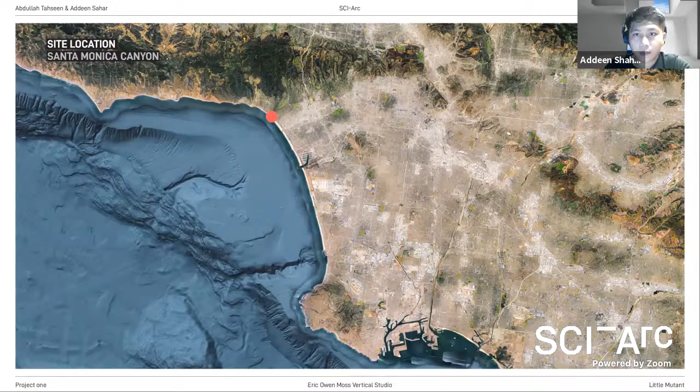So, as Eric Owen Moss said, the site is located in Santa Monica Canyon. The single family house project is at 211 North Entrada Drive, Los Angeles, in a neighborhood called Rustic Canyon. The boundary for the new house has similar dimensions to the under-construction house, with a height of 34.6 feet, a plot of land that is 30 feet wide and stretches 80 feet from the street access to the Rustic Canyon Canal. Those are the 5 views.

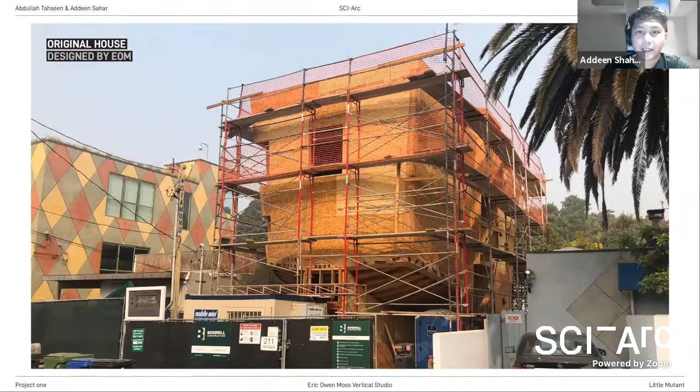The quote that we chose is by Ernest Becker in The Structure of Evil. Quote: 'The whole problem of liberating individual creativity versus ordered culture is summed up in these questions. Intellectually, the problem is, as with Socrates in the West, to what extent can society allow the innovator to offer up new meanings opposed to the cultural forms?' And the approach we took on how to eradicate the minds of the cultural norm is to retain much of the existing elements of the current site and the original house by Eric Owen Moss Architects, and to create a new living method that ties the client's personal and professional needs visually in the exterior and in an interior open space.

So for a post-COVID house, our proposal rethinks the single-family house typology and finds in the current pandemic period an opportunity to break away and liberate architecture from sociocultural influence and norms. Perhaps also to start rethinking and re-establishing what a house is, what its necessities are, and most importantly, what role it plays in one's life in the future.

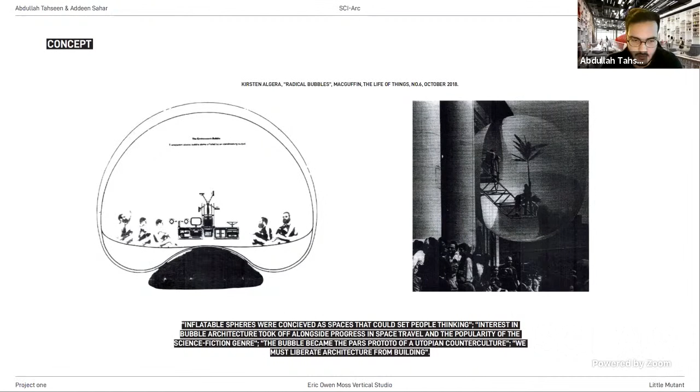Starting with the concept: our concept in this proposal was inspired by bubble architecture, or pneumatics. I'll quote from the Radical Bubbles magazine: 'Inflatable spheres were conceived as spaces that could set people thinking. Interest in bubble architecture took off alongside progress in space travel and the popularity of science fiction. The bubble became the pars pro toto of a utopian counterculture, and we must liberate architecture from building.' These are the kinds of things that we started to think about.

Starting with the concept, we think of this as sticks and marshmallows, where the sticks are the primary structure, the columns, and the marshmallows are the volumes that hold everything within them. As you can see in the image on the right, as the spheres expand they engulf whatever is around them—in this case, the columns. Then we have a multiplicity of columns that also have other marshmallows, or volumes, surrounding them. Along with that, we have a spiral staircase that holds and wraps everything together, keeping it in place, while also creating access points for circulation and bringing the entire project together.

In the construction sequence of the new house, you first empty the site and excavate three-quarters of it, starting from the canal side to the height of the canal when it floods. A shallow pond on the canal side is designed to allow water from the flooded seasons to enter. A semicircle is excavated next to the retaining wall, closer to the street side, to become a three-step outdoor theater.

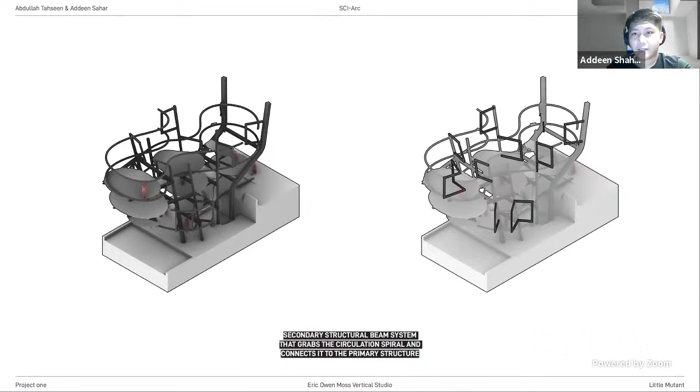The secondary structural system is the horizontal bracing for the spiral circulation, welded to the vertical structure and connected to the pipe system. The spiral stairs are installed to circulate around the entire house, with interior stairs connecting the floors in between. A mesh structure for the enclosure is welded into the I-beams, as it heavily depends on the structural system to stabilize its position.

Next is the concrete shell for the mesh structure, which takes its shape as it's mutated in response to the squeeze and pull of the vertical structure and the spiral circulation. The interior enclosures, which include interior stairs allowing quick vertical movement between the larger enclosed volumes, are then cased in. The concrete pieces for the spiral circulation are individually placed in between, held up by the pipe system and the horizontal bracing.

Glass and mullions are enclosed onto the spiral circulation facing the house environment. A balcony overlooking the street view and a rooftop has a non-obstructed 360-degree view of the ocean and the Pacific Palisades Hills, the last step to be added into the project.

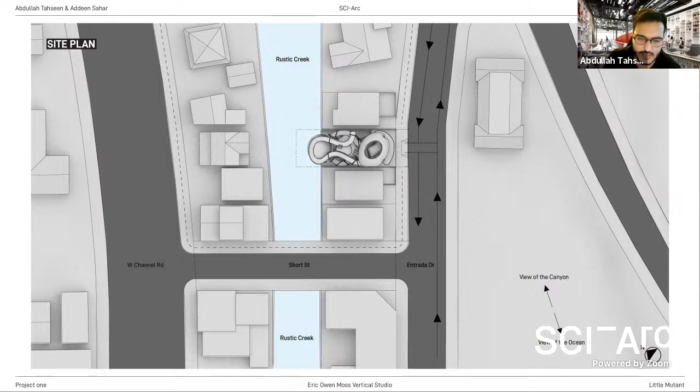So this is the completed project in relation to the site. In terms of the site plan, as explained by my partner, we have a canal that runs on the north side of the building, with streets on the other side and surrounding neighborhoods.

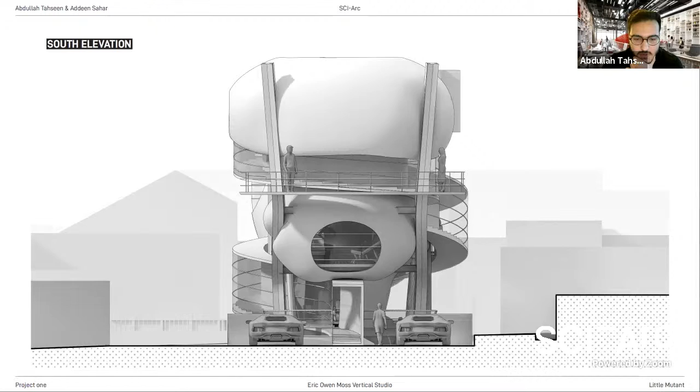Here is the south elevation of the project, or the front from the street view, with two parking structures for two cars as per the program.

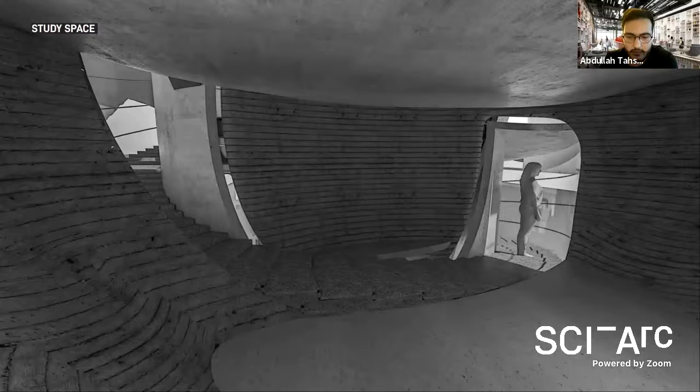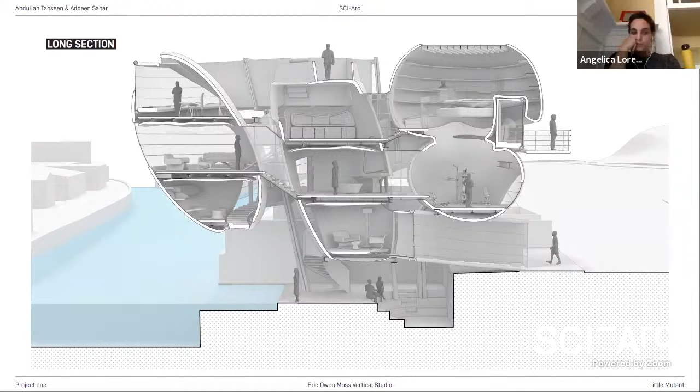So yeah, basically we tried to create a new kind of spatial organization structure within the house, something that isn't pretty much seen in houses normally. We wanted to rethink what a house is and how it could operate as a house, and what is inside the house.

So in this section, for example, you can get a glimpse of the kind of things that happen that are not traditional or conventional, spaces that aren't directly open to one another, except in certain cases here in the middle. Otherwise it's basically the circulation ramp, and then you have the volumes with access at certain levels. So it's not a very conventional setup.

It's not a conventional sociocultural norm, but it's a house that looks at the future and the current situation of the pandemic, and wants to provide a solution that's both sustainable and architecturally mesmerizing.

I think the question, another way to phrase it, is that notwithstanding you guys did a substantial amount of work for a 3-week project—it's astonishing, actually, congrats on that—what you've told us is essentially what you did, less so why you did it. In other words, what the meanings are of the pieces.

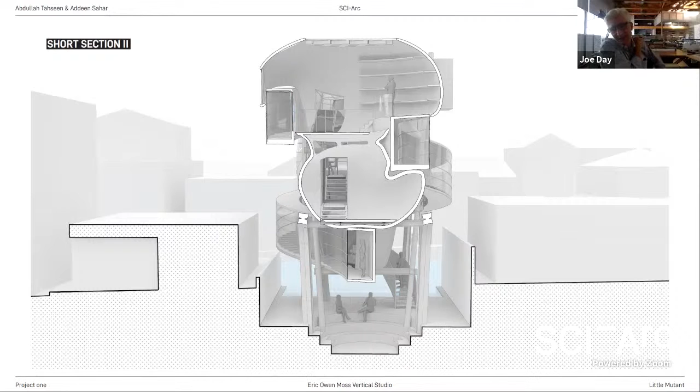Yeah, I wonder, Eric, in terms of COVIDity—I want to touch on this because it is of the moment and might be for a while, but I don't want to linger there—I think your project makes some compelling moves in that direction, but they're not even maybe in the top 10 most compelling things about it.

But the degree to which your marshmallows set up at least three sort of stacked zones of occupation, the idea of COVID sequestering becomes possible. To a less convincing degree, you set up outdoor spaces that correlate with at least two out of those three. So if I imagine it as three vertical zones that have something to do with one another, but could support people going through COVID and having to be quarantined, I buy it, and that's fine.

But I was thinking as you were presenting it, honestly it's a fantastic project, and I'd be inclined to explain it in more pretentious terms, because I think it could weather it. I think your house has a lot to do with Frederick Kiesler's Endless House, as sort of reimagined, or actually literally restructured, by Rem Koolhaas's paranoid critical diagram—the one where he has a slingshot holding an orb between its wishbone. I think it's a fascinating house that takes up some truly serious precedents in a compelling new way.

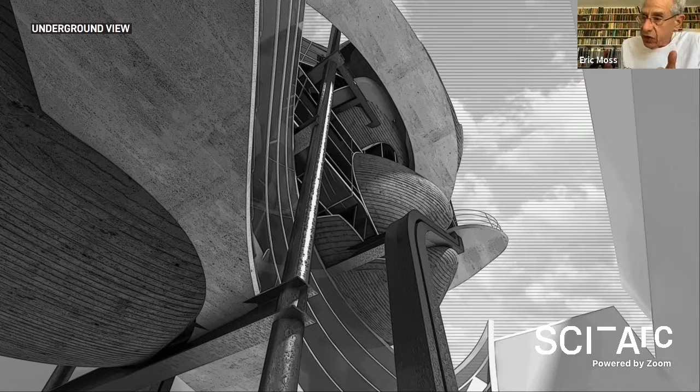if you had 4, my push would be for that kind of difference. As a response to that, what's of interest is that for all the Kiesler discussion, I think Kiesler had a kind of originality that this probably doesn't, working with things that maybe were buildable, but on the margins, and this kind of conceptual fluidity—that somehow what's orthogonal in a literal sense boxes you in a deterministic way, whereas something with a kind of fluidity might free you, at least metaphorically.

And you could probably believe that in 1920. I think what's interesting is, for all the revolt against the normalcy of the neighborhood and its essentially orthogonal stuff, when you depart from that, you have to be careful that there's not another motif—that you don't forego one formulation, which we all recognize, and put in a surrogate, which at some point, by the time there's one, then is there two, then three, then four? In some sense, aren't you replicating the repetition of the neighborhood?

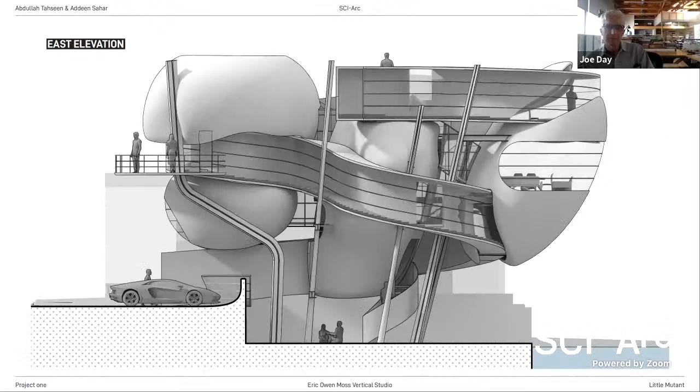And the argument against that is that the juxtaposition is between this house and everything else, as opposed to between the pieces within the house itself. Fair enough, and that's a discussion. In other words, does it get easier if there's one of these, or two, or three, or four? At what point does it become itself a rule and not an exception?

Can I ask a question, Eric? Because I read it as sort of a threesome in its own right—maybe this section makes my case for me, though. It reads very much as a kind of triple townhome party, where you've got these stacking back towards that waterway. And I so hope, Eric, in the actual project, you're able to claim some of those air rights and do something like this. That would be fantastic.

But no problem, just a question to you. Do you mean, when you talk about a multiplicity, if there was more difference on the block, would the specific differences of this project come into question in another way? I think that's the issue you addressed, when you made the point that what was anomalous in a single sense becomes redundant in a multiple sense.

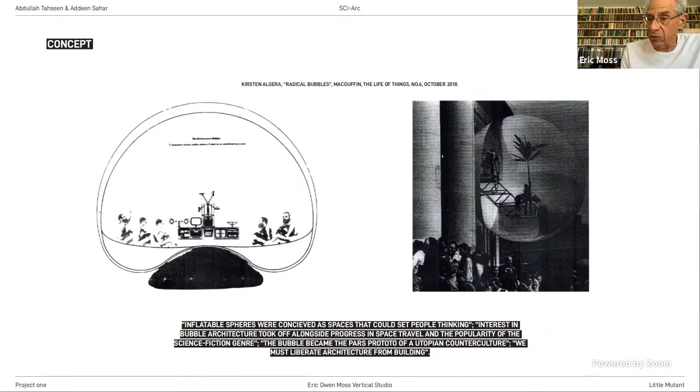And in doing that, the novelty—and I don't mean that pejoratively, but novelty in an innovative way—is deprecated if it's repeated and repeated and repeated. So the question is, does it become formulaic? And I think my response was a response they could have had to the question you asked, which is the juxtaposition between pre-COVID and post-COVID, or pre-COVID and COVID in the interim.

Is the building as an aggregate juxtaposed with everything else on the street? And then you'd have to look at whether those are actually four pieces, or the way they presented and argued for it. If you go back one image—

You look at the drawing on the left, which is a kind of ethereal drawing, as if that transparent amalgamation of stuff is actually a single piece and operates as a kind of bigger room—because the spaces are assigned very conventionally and typically. This is a bedroom, this is a kitchen, this is a dining area, this is an office. So even though the shapes vary, the question is whether pushing those things together would have given you something.

One of the things I had argued for these guys is that they omitted—hang on just a second, Todd, we're coming to you—but can you put up the structural framing, Addeen, or the framing of the bubbles before they become solidified, which suggests potentially a different kind of continuity between the pieces. Anyway, Todd, fire away—I think I have a related question.

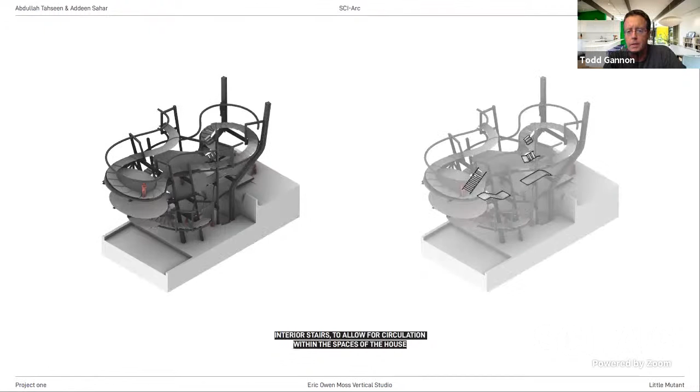To your point about whether this is in contrast to the neighborhood or not, I mean, it is. I think there are a lot of similarities to the neighborhood, as has been mentioned. It's a building made out of rooms. The rooms are pretty conventional.

But what I see is the real leap this project is taking: it's all the corridor. One thing you're not going to find a lot of in that neighborhood or in single family residential is the incredible excess of corridor being proposed here, which I think is potentially interesting, that somehow a post-COVID house gives you this sort of route that you can walk.

The independence of that route seems to me important. Now go forward one. There we go. One thing that you didn't talk about though, which I'm interested in—no, go back.

See these guys? There seems to be a third system. You've got the marshmallows, the corridor, which I think you could argue more forcefully for its role in the project, but then there are these little connective tissues that you didn't mention at all, these shortcuts. We talked about the chutes, but not the ladders. Exactly, and I think the difference between the chutes and the ladders is very important—how these begin to make the kind of connections between the marshmallows that Eric is asking for.

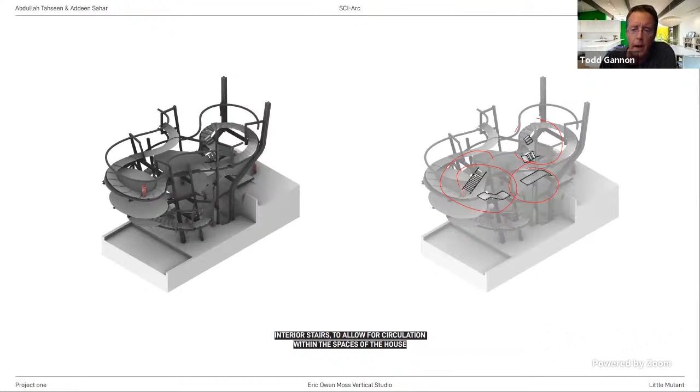So I think, first of all, for a 3-week project, this is impressive as hell. But the opportunity I see is that you've actually got the seeds for more difference in place, but you haven't really drawn our attention to them. So I think I would try to make more out of that corridor as a new kind of domestic device, and I would make a lot more out of these little connective elements, which seem to break down the conventionality of the rooms you've arranged.

So if those could make it so that I have not just a bedroom and a gym, but a bedroom-gym—I don't have just a kitchen and a dining room, but some kind of combined space. Can you begin to imagine more potent or imaginative combinations? I think you could.

But that's really what I'm looking at here, is that I think this is at its strongest when it moves away from convention, but I think the sort of conventional house is sneaking in when you're not looking, and you have to be very careful. I think the big corridor is a way to keep the conventional house away. And yeah, that's what I would look at as you move forward.

Are you guys so done now? Sorry, no, go ahead—is the project over now, or do you keep going? Yeah, this is it, and then we go. The other one's substantially larger, it's going to take a little bit more time.

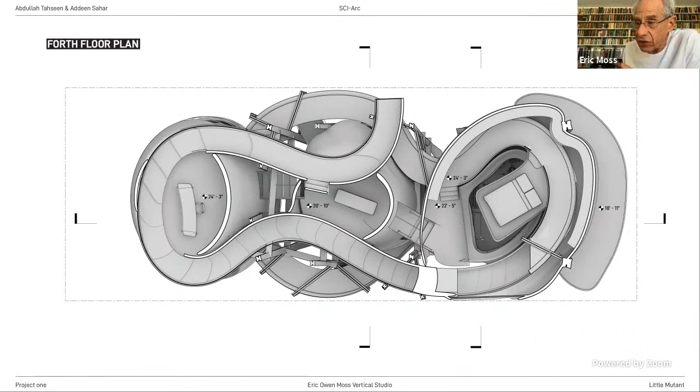Wanted to make one comment, Todd, and to the guys who did it, in terms of the interrelationship between the story you tell and the conceptual content of the project. Because, for example, as they told the story, the walk and the stair and all of that are somehow part of the incidental stair versus the systematic stair. If you associate that with COVID and the idea that let's make an office building and every person has her own elevator, let's say, and the issue of circulating independently for the obvious reasons.

So if that walkway and the little incidental ups and downs, the little stairs, had been understood the way you explained them—as a very particular and pragmatic response to issues of getting around and not bumping into 6 characters on the way—then it immediately takes on, and you explain it differently, you probably organize it differently, and then it fits more in the argument of what's coming next and why. As soon as you say that, it raises all the questions about circulation and movement in houses and office buildings and guests and so on.

That just seems to be a really constructive point. Angelica, did you want to make any comment, or have you had enough of this one?

No, I just wanted to suggest maybe a project that you want to look into: the Angewandte, the proposal for the renovation of the Angewandte by Wolfgang Tschapeller. Do you mind writing it down on the chat? Yeah, I can put it down. Are you talking about that competition? Yeah, I'm talking about the competition, which was obviously a subject of a lot of rancor and debate.

Yeah, this is delicate territory we're entering into.

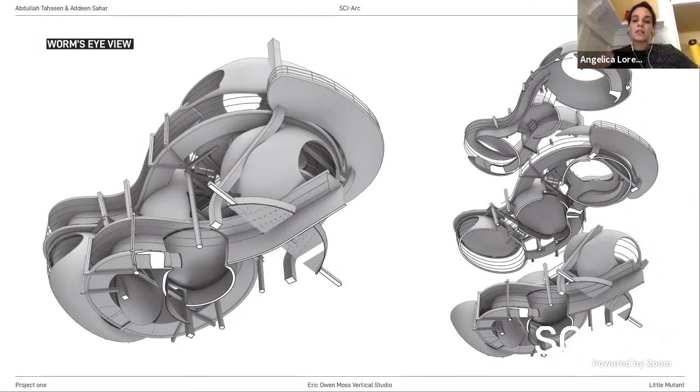And a little bit in your case with the house, as Eric was saying, it's hard to think about the post-COVID since we are still amid the COVID situation, but maybe you can start thinking about a time in between the two, the before and the after. That's why I was thinking about the project, and also because of the diversification of the space. It's not only bubbles, it's something in between a more rigid structure and more curvilinear spaces.

So maybe, Angelica, maybe you know—I mean, I obviously remember that competition. The question is, was it... I mean, it was published in a sort of blog magazine kind of thing, and everybody was complaining for various reasons. The question is, did the school—I doubt this—did the Angewandte ever put it together in a brochure, a book, and publish it? Is there a print version of that?

No, the only thing that I've seen are the renderings that actually a friend of mine did for Tschapeller. That's the only thing that is available for the public, but no plans, no sections, no drawings, nothing else.

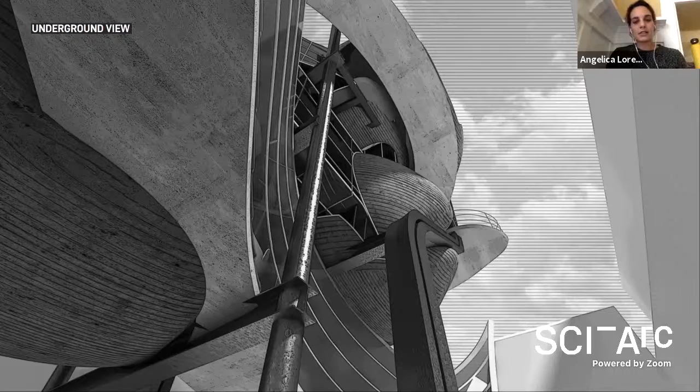Right. And then the Angewandte went for a completely different project. I mean, they just finished, right. The story of that is we'll talk about in Starbucks someday.

Anyway, thanks guys. So Eric, real quick, just to build on what Angelica just said, which I think was a very smart comment—the possibility of seeing this, there's a before and after COVID way to look at this. And I wonder if there's also a way to look at this as a kind of, you could organize the house in two different ways. It could be closed or open, depending on the degree of separation the occupants need.

So like if everybody's sick, you've got to be in your own bubbles and you can kind of close it. You can still be around. But if everybody's well, you can open it up. And it seems to me that the house has the potential to operate in a whole bunch of ways, so that the diagram this project begins with should be more complicated—there should be more versions of that diagram, more possible connections that open and close.

And it seems to me that if you were to keep going, to look at that potential for this thing to be not just one or the other, but both, depending on how—I mean, I think both in terms of your comment about the efficacy of the walkway in terms of COVID, and as we talked about, the capacity to make one thing. I think potentially the liability of the four pieces is that they're discrete.

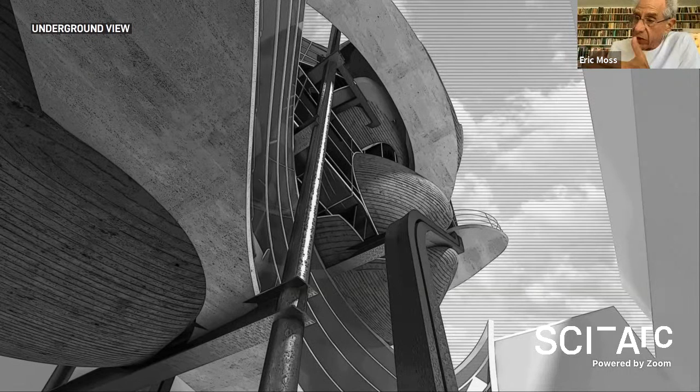Yeah, and they have to be discrete to be what you said, and they have to be able to coalesce in order to be what you also said, in terms of who's together and who's apart. Can you go back to the model, Addeen, or go back to the model?

One thing this suggests is that's the project, period—or half of that is the project. Can you take down one model? Just take down the one on the right, leave the one on the left of those two.

Right, and the question is what the meaning and the reason—I mean, it appeals to me that you would have very different directional meanings and organizational meanings. And in some ways, back to Todd's comment, it gives the bubbles a very different notion. For instance, facing east, which is the mountains and then the city, versus facing west, which is the ocean.

And there are multiple possibilities for this, because some of these pieces could remain as they were. This is just another option, another way to look at it, which I think goes to prove that at least where we are, you're never finished. Yeah, but I want to—Joe, did you want to say something?

Just briefly, building on your point, Eric, I feel like you could have played with the tire pressure of your four orbs, and at a certain point, with a little bit more tire pressure, they'd start to rub up against each other. Arguably, they might start to bully one another, and it would have hybridized the volumes of your project in a new way. But in any case, it's a great project. Congratulations, good.

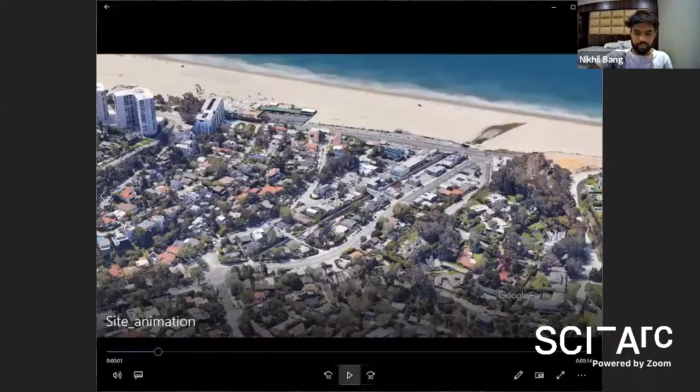Starting with the site animation video, the site sits in Santa Monica, 211 Entrada Street, near the beach, Pacific Ocean. The site can be viewed from different angles across the neighborhood. There's a canal on one side and the street, the Entrada driveway, on the other side of the site.

So this is the site. Our house was designed for single family living, keeping in mind the COVID situation, the pandemic situation. We tried to give as many open spaces as we can, probably on different levels, also space for physical activities like skateboarding areas.

So let's go step by step. First comes the parking, then the raised platform. After that comes the skateboard area, deck maybe with the structure. Then the circulation comes up. The second level of the house, the ground level or the first level, is kept free of everything.

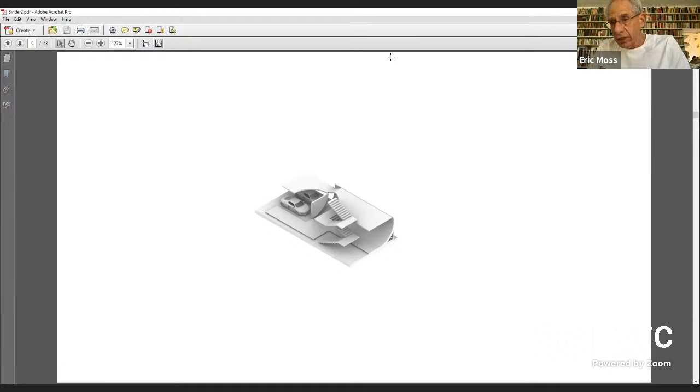If you want to enlarge it, can you enlarge it and rotate it so everybody can see instead of just from one vantage point? You want to show the Rhino model? I just want the jurors to be able to see what you're doing. Can we only show it from one angle? Can we share the Rhino model if you don't mind? Yeah, sure, you can see that.

So this is the site with one side the canal and the other side the street, starting with the parking area, then the raised platform, then the skateboard area with the structure for the skateboard area, then the circulation.

Second floor level, third floor level. These floors then get divided into different rooms. So the third floor has two bedrooms and the second floor has a kitchen and a study room. And the exterior walls.

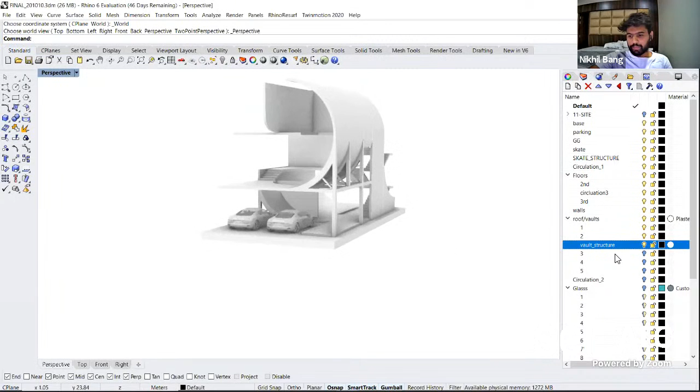So it comes up like this, the structure for the second wall. The walls come up, and then a theater space on the canal side. Then the circulation joins from the second level to the third level and forms a loop of circulation. There's a drawing that will be shown afterwards.

Then comes the glass, which covers up the whole building and leaves areas like open terraces and the theater area and the staircase at the bottom. Then comes the wall near the staircase with shingled glasses, to provide as much openness, if that's the right word to say.

And then comes the structure that holds the whole house. So there's only one specific shear wall, maybe, or the load-bearing wall, which is this one, like the whole wall. Everything else is held by these two structures, these three. And then comes the theater space for the canal side. And this is how it is on the side.

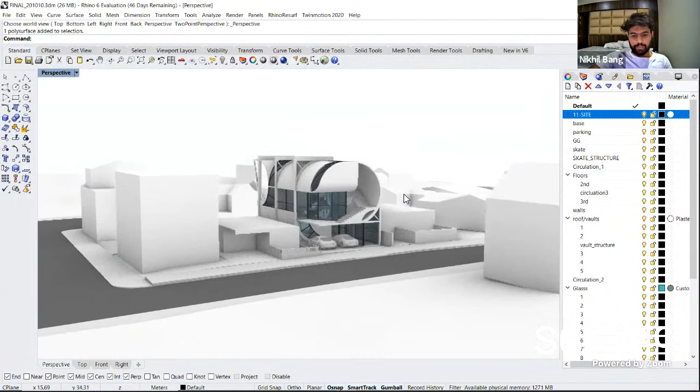I'll just share a turntable, a short turntable, to show the house from all the sides and explode it. So this is how it is from all the sides, different levels, different sides, and the circulation.

You're gonna do that and rotate it on the turntable when it's open—why don't you freeze it for two seconds, so it works like a still, not like an animation? Yeah, so.

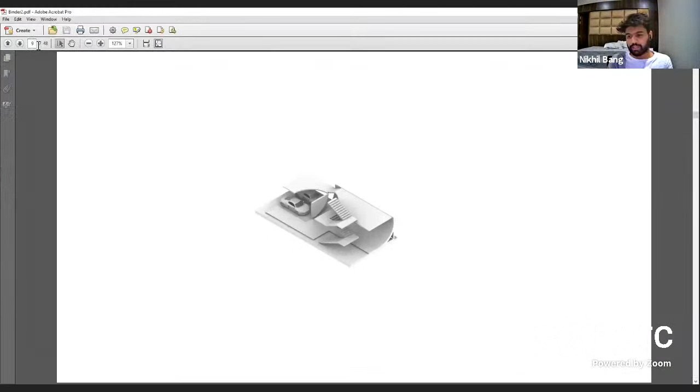Who's your client? A single family house, like it's a single family. No, I know, but you have this skateboarding area at the bottom—so who's the client? Is it a skateboarder, or do we all have to become skateboarders? For example, no, I'm very bad at it, I can just sit on it. I don't think the idea was to have a specific client for the skateboarding thing, but the idea was to have some physical activity area in the COVID situation when you're not allowed to go out, in quarantine times maybe. So you have some area to play, to be inside, and not be inside a black box or a white box, but have some open area in your house.

Kind of, yeah. For what it's worth, I've skateboarded the street. I bought my first surfboard four doors down, on the other side, at a surf shop called Natural Progressions. And Reyner Banham took his famous shot outside a public school in a cowboy hat, two blocks north of here. This is a really storied location for Dogtown surf culture.

So I'm intrigued by the skate driver, just for what it's worth. I took building half pipes seriously enough in my youth to actually be very skeptical of how architects were playing with curvature in the 90s and early 2000s, and didn't indulge much in it because I had some idea of what kind of curves you do and don't need.

You've got a really nice skate ramp at the very top of your project. The only skatable surface in your house is that tongue at the very top, but I like all the quarter pipes to nowhere in between. It's cool, and I actually do think, iconographically in this area, I like the way it has a nod to that surf skate world it's smack in the middle of, and also, maybe more poignantly, the infrastructural nod to the canal behind it, which very few people are even aware is there. I think your project keys to, again, a Banham sense of the deeper palimpsests of the city that not much of LA acknowledges. I think you're playing with these quarter turns in a pretty artful way.

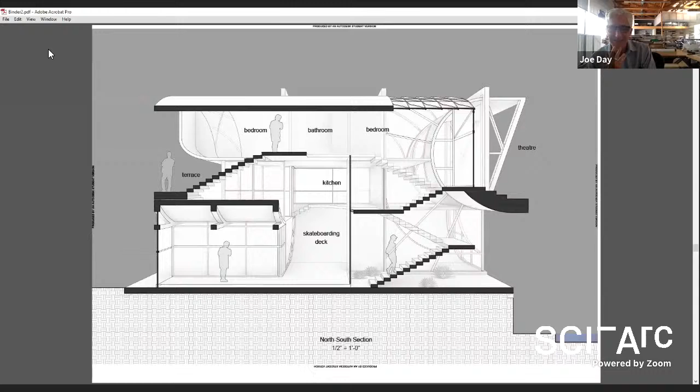This is a section where you can see more clearly what's going on inside. The terrace at the upper left is the one that is actually skatable. Although, people would probably do some cool things with all the stairs too.

Should we trust your expertise on this, Joe? Do you know what the hell you're talking about, because I don't think anybody else here does. Hey, listen, I'll vouch for Joe on that one. I mean, I think there are some... yeah, Todd's got some credibility here too.

But the issue is whether or not this is skatable. At the moment, doubtful. Wait a minute, Todd, are you a skateboarder? I'm familiar with the world of skateboarding. Yes, that's a very equivocal answer. I'm not a skater, but I was a biker, so I understand the ramps. But I also understand that when you get to the top of a ramp, you need air, not a floor. So there are some issues with how these would work.

But coming away from the skateboarding a little bit, I wonder if the house were able to break down some of the barriers between the spaces—could the whole house be skatable? That would be interesting, rather than saying this is where you skateboard, this is where you sleep, this is where you eat. Are there opportunities for a bit more continuity, which the tectonic language of the project seems to suggest?

But then again, the COVID question puts pressure on our habit to move toward continuity. What I'd be really interested in this project is seeing you wrestle with a drive toward producing continuities and combinations of spaces, but also the necessity of segregating spaces from one another. Right now, the spaces are segregated, I think in most cases, to the detriment of the individual rooms—they're not really great rooms because they wind up being very chopped up and closed down.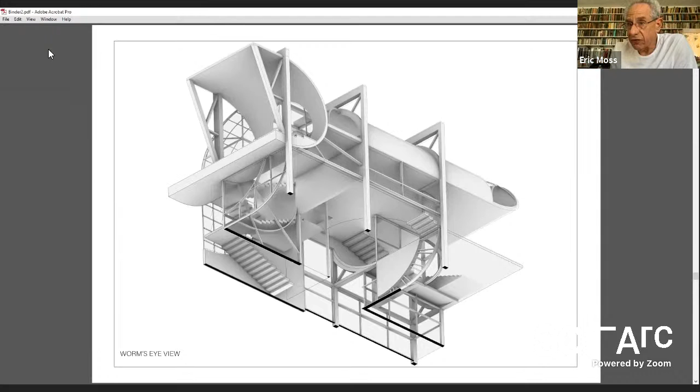But then I think, as you pointed out, it belongs operationally only to the ground floor, notwithstanding you bang your head on the second floor. And the rest of the redundancy of the shape has nothing to do with the redundancy of the use or the purpose. And then it becomes a kind of motif. And the curve or the skateboard rendition becomes kind of incidental because it only happens once.

And I think that also you have to be conscious of the other associations that come with that shape language, right? Look at this right here, how it's starting to curl back on itself. It looks to me a lot more like a wave than a skateboard ramp. And this wouldn't be the only house in Santa Monica Canyon that features wave motifs. So I think there's a decorative quality to some of these curves and a set of associations that seem to go beyond your intentions.

That's always going to happen, but I think it's important that you're conscious of those. Would it be okay if someone came along and said, hey, this looks like the kind of surfer wave house, cool? Or would that undermine the message that you're trying to advance?

I wonder too, Todd, something that would abet or color that reading of this house in an interesting way. As I look at it, the longer I look at it, the more my questions gravitate to the exoskeleton. I agree with everything that Eric and Todd have said about how the quarter turn language isn't actually working, is spatial but not organizational at the moment, and probably demands to be both.

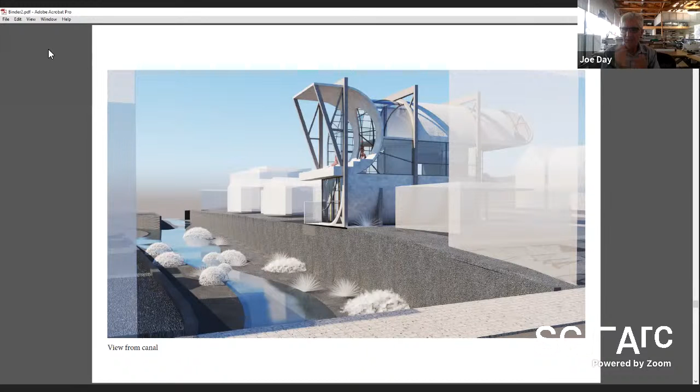And arguably, your exoskeleton, especially the upper parts of it, sort of added in late to this. And I'm not convinced they're necessary to do this in wood. And I'm positive they'd only be necessary for form work if it were realized in something like the concrete you kind of indicate by material.

No, you're right, you don't need that. For sure you don't. I mean, you can build this thing and make it stand up. We know that, depending on what you're constructing it out of, but you can certainly do it without the frame. No question about that. There would be another argument rather than, yeah, go ahead.

No, sorry, I mean, just on the frame, because it's quite clear that the frame is not necessary, at least tectonically, we have to assume that the frame is necessary in terms of the architectural intentions.

That frame, even if it's not necessary to hold up the building, it does seem to be a key player in holding up the argument that the architects are putting forward with this building—that there's something about the contrast between that frame and these curvilinear surfaces. But that hasn't been spelled out by the architects, so now we're left to imagine what that relationship might be.

One of the arguments is that these pieces never exist in a solitary way. There's always a strut or a prop or a frame. When you look at it carefully, they exist in plan, they exist in section, they exist as the exterior of the building, and it's kind of musical in a way—almost a harmony of the pieces.

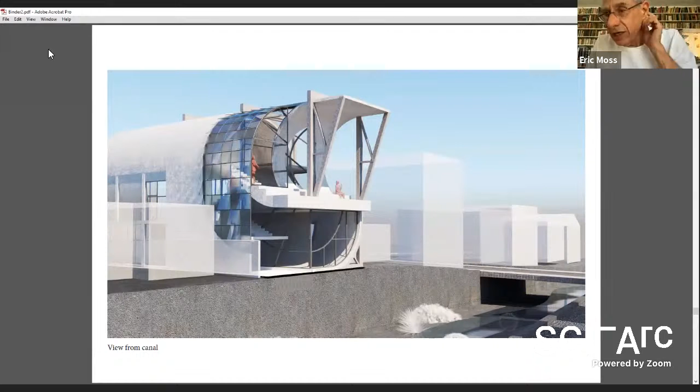The mistake that may have been made was to try to designate something purposeful in one without designating something purposeful equally and oppositely, because most of the pieces don't mean they enclose a space, or complete a space, or define a space—you're working around them. The program, interestingly, like the last project, seems fairly conventional, and it gets interesting in these odd spaces that look over the canal, or open to the street, where you break out of that.

I also think there's a bit of a missed opportunity in using the curvatures in your surfaces to create a sort of poché space, where you could liberate your plan completely and really use it—as Todd was saying at the beginning—almost making the entire house skatable, putting the stairs or anything blocking the space into the poché, especially since this is an undersized lot.

One thing you realize during the pandemic is you have to move all the stuff you had in the office into your house, so you have even more stuff than before that you need to store somehow. That's a very tractable problem during the pandemic, and it's something you could think about, especially with this idea of fluid, continuous space.

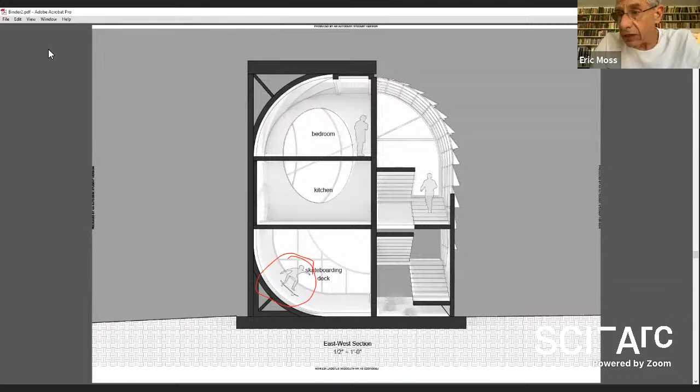And if you did that, meaning this stuff, so you're working with the volume or pieces of the volume, and this guy goes flying through the middle somewhere from the top to the bottom, and goes off and on the curves. Because when you look at the plan of this floor, the top floor, what you've got is actually a corridor and three rooms adjacent, and yeah, that.

This seems to be really a non sequitur—the building seems to be worthy of much more than that. It seems, Eric, a lot of what you need to live could wedge its way into the undersides of those. Yeah, there's a lot of poché there, to Angelica's point.

I think, LOT-EK—ten or twenty years ago—the practice Lot-ek had a genius for creating these multi-use curved environments that were really smart that way. I mean, Airstreams are kind of brilliant that way too, and I'm sure it would happen.

Well, the one that interests me the most is the one where they occur at right angles to one another on the top, but they're separate, and that relationship is a kind of odd one. The other thing worth considering is that the thickness—depending on how you actually supported this thing—the thickness at the top of the curve of the slab and the thickness of the curve as it becomes a wall might vary.

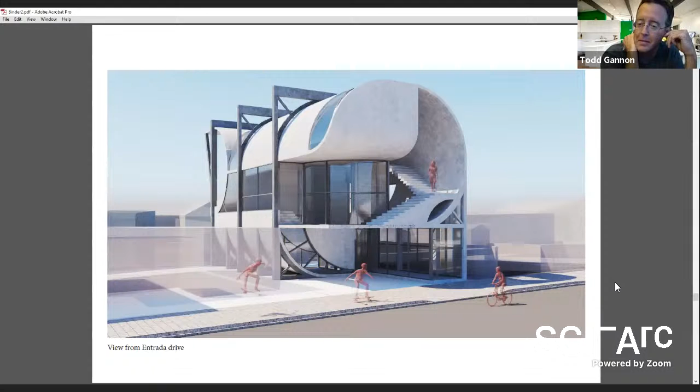That house has a much bigger site, they've got a lot more room to move in the Vault House. So how could you reimagine the Vault House as compressed to the scale of this site? Could you plausibly get all the stuff in a house that's twice as big as this onto this site? And what kinds of architectural intelligence would be required to make that possible, right? Because right now you have some incredibly tiny rooms.

You've given over a huge amount of space to circulation. And I think just in terms of pragmatic organizational issues, taking seriously questions of efficiency would make the formal problems you've taken up take on new meaning, or take on an intensity that right now they seem not to have, right?

It seems that the world of the curves and the world of the rooms seem not to have much to do with one another at the moment, that they kind of exist independently as problems you're solving. I suspect if you were to study a bit the Vault House and other houses like it, you might find ways where those two aspects of the project begin to bump into one another more productively.

Okay, thanks. Joe, did you want to say something else? Sorry, I don't want to be the tail end of all these, but you're the surfing consultant here.

On this particular one, I know this is my backyard, and Johnston Marklee's Hill House overlooks your site, and it's got some really ingenious... it's doing other things in terms of its formal generation, but in terms of what Todd's talking about, just very savvy residential spatial efficiencies and taking advantage of poche opportunities, that one's worth a look as well.

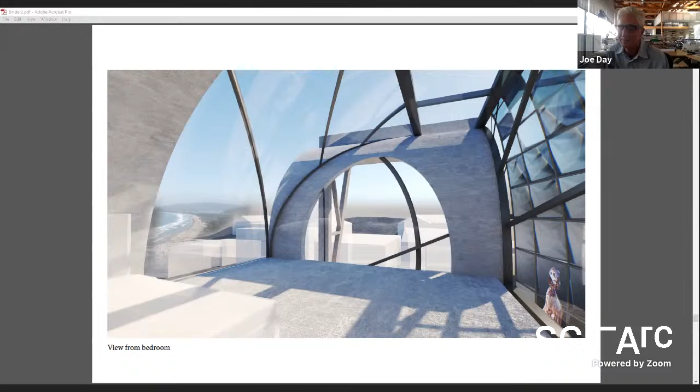Perfect. Okay, thank you very much. Next team, please. Yeah. Hi. Thank you. Good job, guys.

Hello, my name is James. My name is Brock. And this is our presentation for the Canyon House.

We started with a text, and it reads: 'It is not enough for the ideas to be great, the times must also be right.' As Goethe observed, the innovator knows the value of his work - how is he to keep from being torn apart by disjunction with the world around him? Many, like Stendhal, take comfort in predicting that they will be recognized by a future age, that their ideas will find conjunction with a future time, but this still leaves the problem of the present life. We are not interested in finding conjunction with future time, but designing for disjunction in the present world around us. All we have is the present life and the world around us.

We start checking where the site is and where the potentials are that we could discover. In the site plan, the project is a house for a musician couple. The site is next to the canal in Santa Monica Canyon. It is a small residential site. On the west side, it is facing Will Rogers Beach, and the canal is pouring into it.

Here we have a closer view of the site, which is 33 feet high, 30 feet wide, 80 feet deep, and most importantly, extends about 19 feet into the canal.

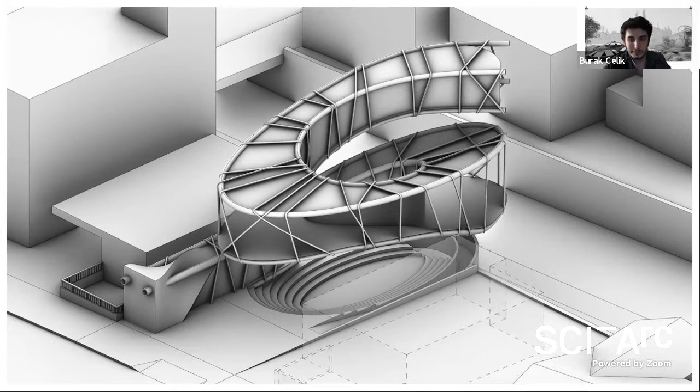And tubes tied together with a structural rope on the outside perimeter. A series of 3 elliptical cylinders are mounted into the void, becoming kitchen, dining, and bathrooms.

The building is encased in a glass skin, as well as the cylinders receiving skylights. Two parking spots are allocated in the front of the site with a sliding gate.

These are just a few axis cross sections. These are the longitudinal sections cutting through the building, showing the relationship vertically and horizontally. And then the other direction.

You didn't explain the piece below grade at all. We're still going, we are. I mean, you're showing it in section, but you're not talking about it.

First stage of structural development is the front entry with the structural foundation. Next, spiraling structural pipes branch out from the main foundation and break into several doubly curved steel pipes.

Central structural pipes are supported by the web of the perforated steel plate shear wall. The perimeter tubes are tied back with structural piping. These cylinders are structured with a curved spiral steel plate and then a lightweight steel cable structure, which is suspended from the structural tubes.

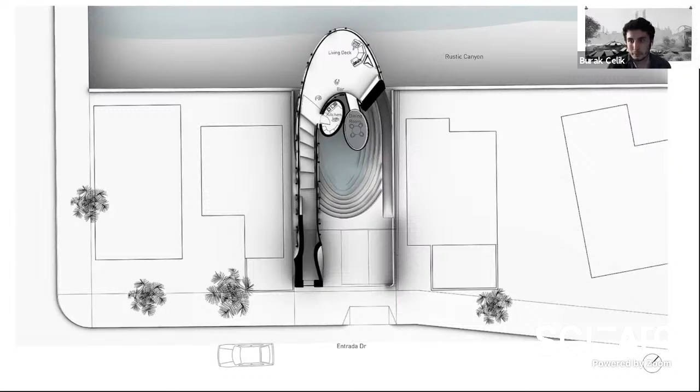On the outside, there is a pond with stairs and a ramp connecting the ground floor to the basement. On the second floor, there is the kitchen and the dining area in the cylinders, both connected to the spiral tube with the living deck.

On the third floor, there is the living area on the Entrada Drive side with the restroom on the cylinder. And on the last floor is the bedroom suite.

These are long sections showing the relationship from the lounge. There is a skylight cut through the ceiling that aligns with the dining room space of the cylinder, which has a half diagonal cut, which becomes glass. So there's a vertical relationship between those things.

And then cutting the other direction, you can see the kind of sagging dip of the basement or the ground floor becoming the ceiling of the basement, and the kind of oscillating corridors that wrap around the building.

You have a glass bottom of the pool, is that correct? Which you didn't mention. A portion of it is glass, yeah.

I mean, if you show that in the section, those spaces that connect all the way up and down have a consequence in the pool. And at the bottom of the pool, there's an aperture that apparently lets light into the space below. That's right, underground. Yes.

And we have the physical model photos. The model is a 1/4 inch scale. And we are showing the building with canyon and cantilever overhanging.

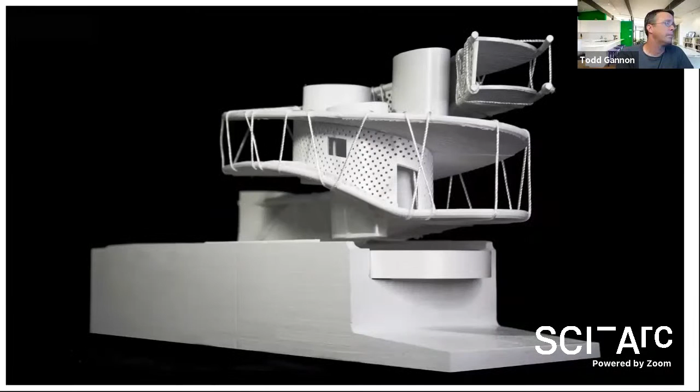And then these are the aerial axonometrics. This one looking northwest, northeast, and then southwest.

And this is the worm's eye axonometric looking up, and then the basement becomes removed so you can see the central void with the cylinders hanging in it.

And this is a render from the southeast on the Entrada Drive. And then these are the aerial axonometrics. This one is from the southwest.

This view is from a bridge across the site, and looking towards the Will Rogers Beach, through the canal.

This is underneath the spiraling cantilever, this pool that Eric mentioned before. So you can kind of see the profile of the skylight as a kind of halo underneath the cylinder, the glass of the cylinder. And we're thinking of it becoming more of a garden pond area, like a meditation sort of space. And this is an interior view looking through that opening, the aperture there.

That is where we were standing before, and the stairs going up in different directions on either side. And then the final image is looking up through that skylight opening through the glass, where you get those different kinds of lighting effects and that kind of solid void relationship through the vertical part of the building.

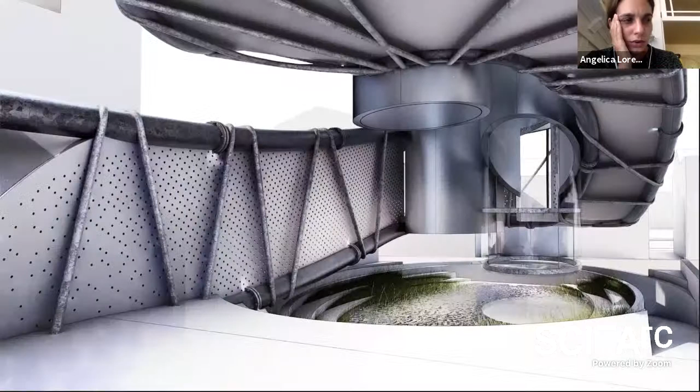I like this idea you have of integrating the landscape within the house. It's kind of like something between an indoor and outdoor space, ambiguous. But I'm wondering if the entire ramp can become a sort of landscape somehow, instead of being segregated just to the bottom, if it could be more modulated, intertwined with the program within the house, to exaggerate that need we have of being indoor and outdoor since we can't go outside. Just wondering if it can be pushed a little more than it is now.

The perimeter of the walkway is glazed, huh? It's not open. That's correct. Above the ground floor, it's open. This lower portion with the white is an open ramp.

It feels to me like the case for your parti and the way this elliptical spiral would be made is largely by how it reframes the landscape, the ocean, and its surroundings as you move up through it. So just as a thought, maybe this will apply to your next project too, with these kind of spiral schemes I would look carefully at how they restage an interior as you look down into the spiral, and how it restages the city around you as you move up.

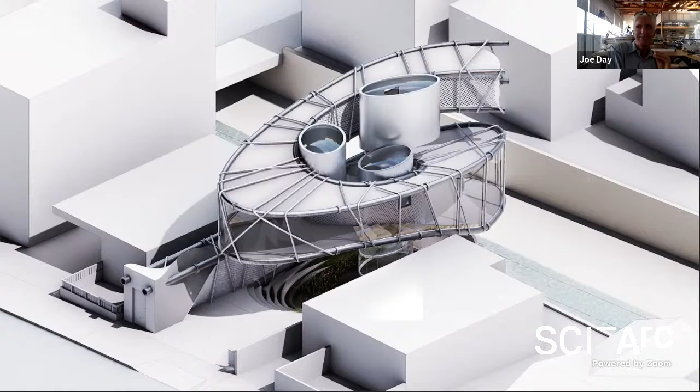Eric asked about the glass bottom pool, and as he asked, I thought, if you have to ask about a glass bottom, if it comes down to details like that, it's a big idea hinging too much on small moves. But actually, I think if those tubes were basically like kaleidoscopes looking up, where your bathtub is glass bottom, your kitchen table is, if you're looking up through people's lives in perhaps dangerously voyeuristic ways, then that whole inner logic of this thing has a kind of provocative frisson that could help sustain it.

There's another question in this which has to do with the meaning of hanging. In other words, if you look at the proximity of that elliptical piece, aside from how it's supported and how it joins the ramp, all of that - and whether it would have been conceivable to run those pieces through, or run one of them through, or would that defile the whole conceptual idea? Because it's pretty tightly packed, and the question is whether you get the point.

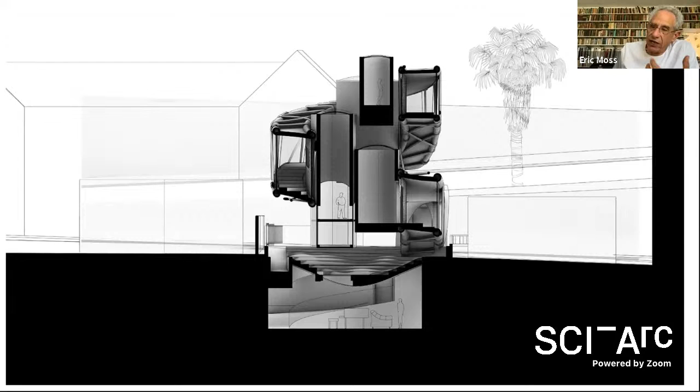It's not only - and I think this was said - that the ramp evolves, and it's interesting, and you could do a kind of composite drawing. You see very different things as you move 360 degrees, very different vantage points up the canal, and all of a sudden you're looking due west, and there's a house they call the Argyle House or the Harlequin House, whatever it is, smack dead in the middle of the west elevation of the building. So it would be possible to argue the vicissitudes of the ramp, both in terms of whatever it means operationally internal to the building, and also what vantage points it gives you, because they're all of some interest - except the one which ought to be the most prominent and essential, if you assume looking at the ocean is the biggest deal of all, and you can't do it.

I don't think we've mentioned this, but the building in the upper left is an existing building, and it's relatively new, so it isn't going anywhere.

So again, the argument about the shape of the ramp and the vantage point it gives you would suggest that if you went back and redid this, the ramp isn't varied enough potentially. That was one question. And what do you get by flying it over a space, which in the end isn't much of a space, except that it dives down underneath the site.

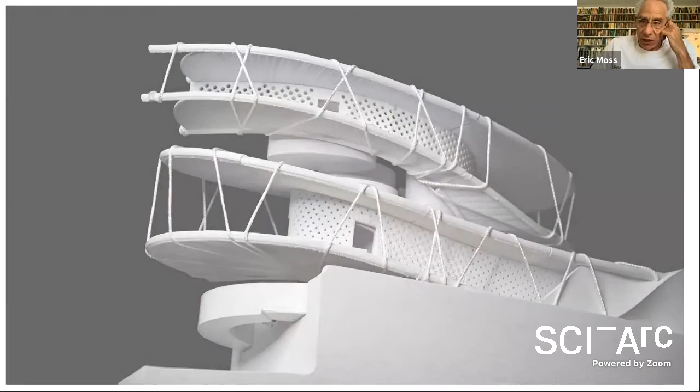So spatially, what you need is a drawing of what it means to be in that pool, in that garden, or in that theater underneath all of those things looking up. It's squished in a way—it's not so open and not so free, notwithstanding the conception of the building.

It feels like you could make another argument, which is to pull the spring apart, to tighten the spring. The other argument is to get between the pieces, so you're on top of the lower ramp and beneath the upper ramp—which I don't know what that means really in terms of an analytical understanding of the whole.

Well, that's what I'm struggling with here. When I look at this—and it's not just this one, all three projects we've seen so far have a version of this issue to varying degrees—it seems the projects are keeping the political challenge that Eric leveled at you in his brief a little bit at arm's length. You're making unconventionally shaped houses, and then stuffing them with very conventional house programs.

In this project particularly, the dead giveaway is inside the plumbing pieces, where you're just putting what look like AutoCAD cells that clearly don't fit very well inside those shapes. Somehow the consequences of putting a conventional room—a bedroom, bathroom, kitchen, or living room—into these unconventional shapes aren't really being considered. The shapes just happen; the rooms are assumed to unfold.

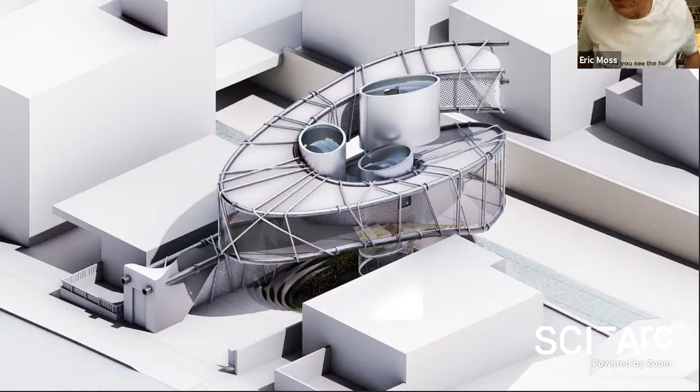Like, what's different about sleeping in a room like that, or cooking in a kitchen like that? I think that's such a good point, and it seems to belong to each of the projects.

In other words, if you make something, the way you individuate it and separate it from the rule, making it the exception according to this advocacy, is in a sense to learn from the idiosyncrasies of what you originated. And I think the point you're making is that learning from the primary organizational spatial idiosyncrasy should be followed up by asking what that gives you as a place to sleep.

As opposed to a more conventional venue for sleeping, and following where that goes—in other words, learn from what you did and extend it, rather than learn from experiences you already had conventionally and simply drop that in, which is a non sequitur, not in a constructive way. I think that's an interesting point.

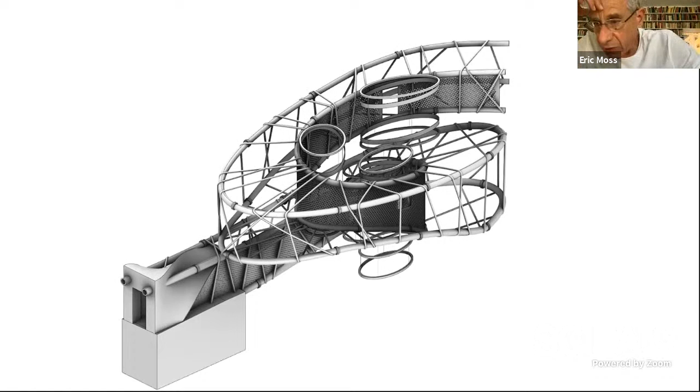What it is spatially is not ever what it is purposefully. And it could be—if it were, the pieces would be attenuated, or would become something in addition to just... I don't like making these odd references to buildings, whatever they mean, but one of the archetypal examples is the thing Libeskind did in Berlin.

I say 'the thing' because I think it was always of greater interest when it wasn't a museum and you just cruised around. When it started to take up—this is this era or this century, and so on—the unconventionality of it then had to accommodate a very conventional organizational strategy, and it lost something as a consequence.

Anyway, I think to me, Todd's point is a kind of... Angelica, did you want to say something? Yeah, no.

What is the second part of the project? What's going to be after this? What's the next project? What is the next step? Are they going to continue? This project is done, this is the end of the project. The next project is a high rise.

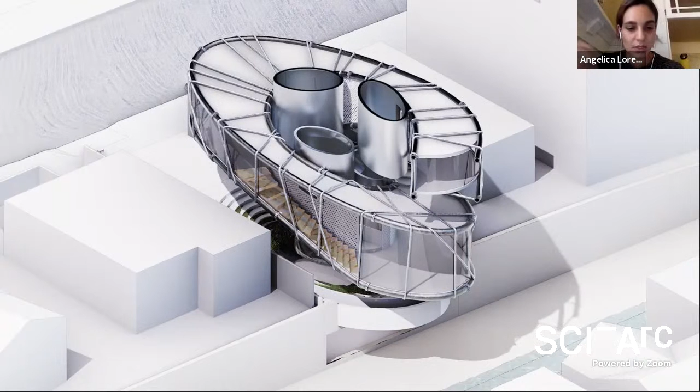Something I would keep that everyone did in these three projects was focusing a lot on the circulation within the house, which, if we talk about COVID, is something you'd want to focus on more in a building shared by more than one family, people who don't know each other and maybe don't want to encounter each other in the corridor. Maybe some of the ideas you developed here with the ramp can be brought to the next project, especially if it's a high rise that's not just for a single family, a more private typology, in a way that ties some of these ideas to the current situation.

I think that's a good point. Todd also made a comment like that in the first project, related to what you're saying, that particularly the movement, whether in an office building or a house, is meant to segregate. You see these discussions about offices, how you get in and out, circulate one way to the bathroom and the other way to the conference room, and so on, that the associations in terms of use with the pieces would evolve as the movement system related to COVID becomes a bigger part of the evolving concept. I think that's a good criticism.

Did you want to say something, Joe? Joe, you're muted. Joe. You're muted. Back with you.

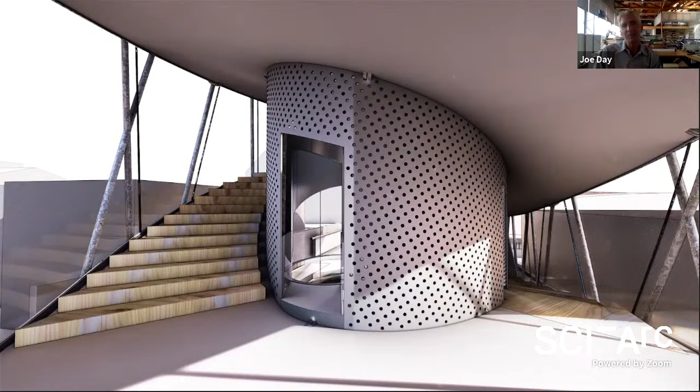I wonder, in terms of the COVID rhetoric of the project, if you would have had to take on maybe—I guess you have a double helix in the sense that it cones down and up—but I wonder if braiding helixes together might have set up a slightly different project. Then again, it's a very small project and site, which leads me to another possibility: looking at this more as a spiraling dynamic mined out of a solid rather than realized as an ascending snake in its own right. If you did that, you'd be more in the terrain of Loos's House for Josephine Baker, which has a kind of scopophilic pool. I feel there's something in this project where the grand gesture is literally swallowing everything else, and it seems like a tight site to get away with weighting your moves so heavily in one direction.

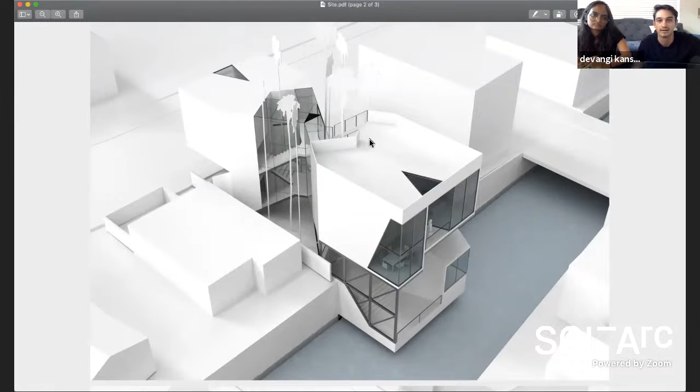So the project depicts a single-family house in the era of COVID. It's located in the Santa Monica Canyon. On the west we have the ocean line, and north and south we have the hills and mountains that crawl up. The site faces two main directions, a canal and a main entry streetway. We really wanted to emphasize the notion of social distancing and apply it in our design quite literally. So we began with a glazed volume, a central glazed volume with a series of intersecting staircases that lead to separate modular rooms. This will be more described in our animation.

The second concept we focused on was the notion of privacy and intimacy that every individual in a household will have. Staying in these 9 months of house arrest, we realized we need a certain kind of privacy at the end of the day. So this house focuses on that idea as well. We're going to quickly share an animation.

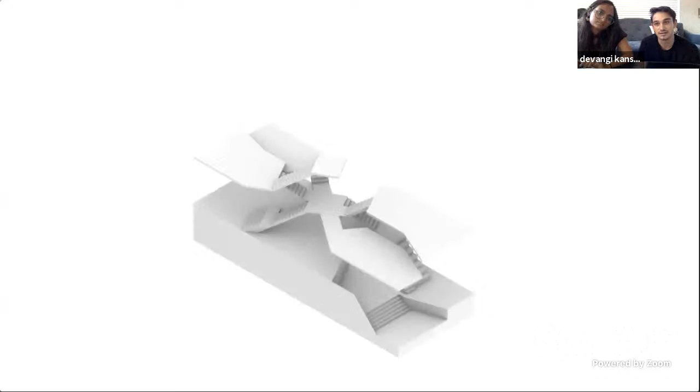From this, you can climb up, and there's another landing which takes you to a series of mezzanines which overlook the communal spaces, the living and dining. These would be lounge study spaces. Finally, from this landing, you can go up a series of stairs which will take you to the main roof deck of the building. This roof deck will have a full 360-degree view of the surroundings.

The full structure is supported by a steel truss, focusing on the idea of circulation and the main branching of the volumes. This glazed central atrium would be the epicenter or the central piece of the house.

From this, these modules branch out and look at vantage points towards the canal, the ocean, and the street. We have also focused on the idea of opacity and transparency, so there'll be light throughout the day. Being the tallest structure in the locality, it has vantage points in all directions.

So now we're going to show a series of drawings. Oops. No, sorry.

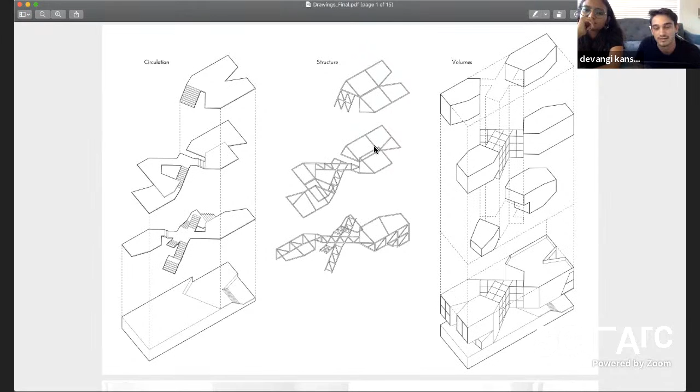The third vertical diagram is our concept of taking the actual bounding box of the site and extending these objects both vertically and horizontally to take up as much of that space as possible, excluding the triangle wells between and around the central atrium with the circulation.

This is our ground floor plan, where we can see that the entrance is from the road. When you go up and choose to go to the library, you have a vomitorium that takes you to the small open amphitheater that looks over the canal. This amphitheater facing the canal is essentially private, and you can only access it from the house itself. It's not open to the public.

The steel structure actually creates an underbelly, which helps create the concept of stack effect, so that if the canal ever has water, the underbelly will have cool air, and these wells we have created in the center of the structure will carry the warm air out of the structure.

Our design also focuses on, we created our design based on the X, and the X allows the structure or the people in the structure to have different views of the mountain, ocean, canal, and the road. So it emphasizes vistas and vantage points.

This is a site plan with our section cuts. We decided to actually create the sections not in a straight line, but to follow the orientations of the X's, so the staircase circulations.

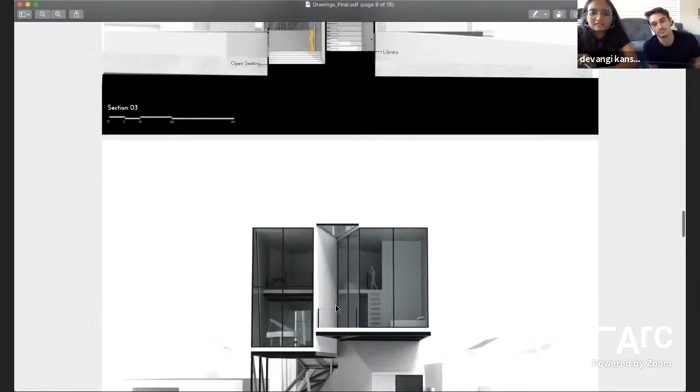These are some sets of renders that we took from the street, from under the structure, and above the structure. So this is facing the street. That's the kids' bedroom and the living and the bar. That's over here.

This render looks on the canal. This becomes the dining and the study, and this becomes a master bedroom. This is the library that takes you down to the amphitheater.

And here's a view from one of the nearby bridges overlooking the canal and the building. One thing I want to highlight is that the atrium becomes the epicenter of the structure, so whichever space you go to, you have to cross the epicenter and then go to the other space.

With a bird's eye view, a couple of images. This is just to show the underbelly of the structure and how the structure is lifted up.

Thank you. Thank you. Thank you.

We actually constructed a volumetric model to really show the different pieces and how they come together.

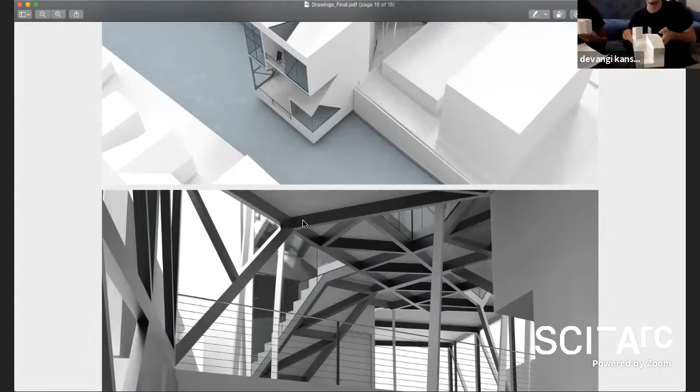So this would be the ground condition with the theater looking out into the canal, and this is the entrance of the building to go upwards. And we have these large trusses. We don't see it, I don't see it, it's not on the screen.

Oh, we're screen—oops, sorry, we are showing it like it's with us. Yeah, we forgot to unscreen share. Can you see this model?

Yep, okay. So we created this physical model to really show how the different modules come together. So this is the ground condition with this volume overlooking the canal, which would be the theater. And this other volume would be the entrance to the house that takes you upwards.

And we have the two different volumes that fit on top of another, this way, to show the relationship between canal and street and which rooms look in what direction. And then finally, the central glazing piece that fits right in to connect everything together.

Thank you, thank you. So this is an interesting project. Again, let me try to tease out some of the hints that I see in the project and tie them back to the prompt that Eric has given you. So your scheme, which I think is very interesting and executed very well, takes...

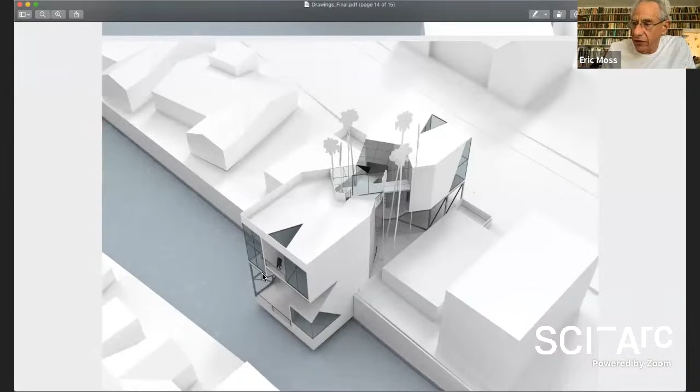And then you'd have to define that a little bit - what does a new room mean? It becomes a kind of hybrid space. Maybe it's a type of space that we don't have right now.

Joe, did you want to say something, or have you had enough? Pardon me, I'm yet again self-muting.

I wonder, Angelica, if the argument this project is making is that in COVID times, the voided hub in the middle is the way people need to negotiate the project and avoid each other. But to me, one of the most sensitively rendered parts is the amphitheater dropping down into the channel, and I imagine that becoming a more viable communal space under different circumstances. So maybe the communal space of this project pulls both up through and diagonally through it, and that negative space, or void space, is spatially the most compelling thing about the project.

As Todd was talking about it, the big question for me was how differently this project, more than the others, begs the question of convertibility. It seems very likely this project would become— it looks like a developer trying to get 6 or 8 units under the auspices of a single house. To the degree that it's isolated, or fragmented, it sets up a very different notion of domesticity in this part of the city, or any conventional single family home part of the city, which I think is a useful provocation, but not one you guys are making.

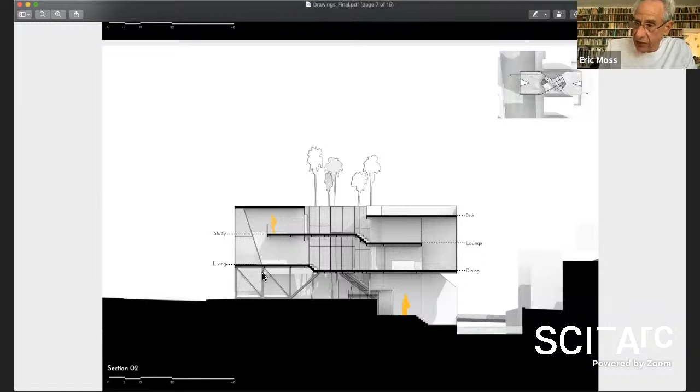But the argument for taking the concrete down from the perimeter, from the sides and the base, and bringing it back to something which more approximates, I don't know, a river, has been talked about, but it runs up against resistance. Still, it should be talked about.

Operationally it makes some sense. The civil engineering conception of water in LA doesn't work any better than utilities or cars, we should go after that. And they had the opportunity to do that in this project.

If you want to get into that fight, Frank can tell you all about that - he's been involved in it, and they won't even dip into the LA River he's been messing around with for 100 years. The Corps of Engineers were involved in a project where you can go over it, which is new, but when you start sticking things into it, they get hysterical. Going over it to me seems like a real opportunity.

But one other thing I wanted to put on the table for the students, in the way you're thinking about this house, with kind of separate quarters that come together into a collective - if you haven't looked at it already, Jose Oubrerie's Miller House in Kentucky is a very large version of that, built for a couple with two grown children. It's three individual houses that live inside a big concrete cage. A fantastic house, and if you look at how it's organized, particularly with the connective tissue of catwalks connecting those three elements, it's doing a lot of the things you're talking about doing. Jose had all kinds of room when he did it, but how you could deliver that possibility on a much tighter site seems like a really worthwhile exercise.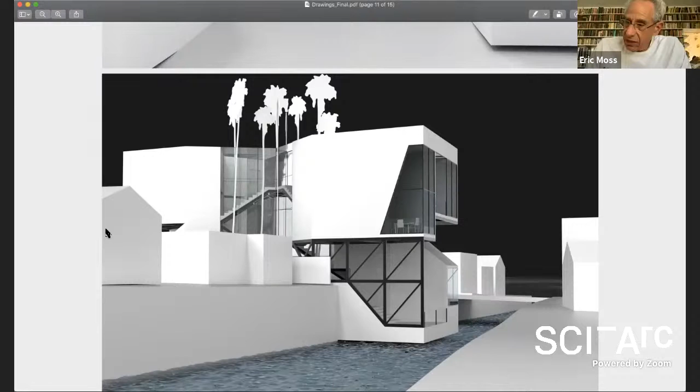And if you were to build that today, it wouldn't look like the models, which have a lack of definition. It would look like the Monsanto house that Disney did. You're right, it would smooth out.

That's sort of true of the Louis Kahn FDR Memorial as well. It's stone, but when you go out to that island off Manhattan, it looks like Louis Kahn with much more technological firepower thrown at it. I would prefer the former, but maybe that's just an anachronism.

It has to do with doing something when you don't know how to do it, versus doing something when you've learned how to do it. There's a qualitative connection between Kiesler's models and drawings and what we were capable of by and large. Now it has a different meaning - nobody could do it before, and now lots of people can. So the invention belongs to the time it was conceived, and the passage of time before it was built means the delivery doesn't belong to the initiative in a way.

You can see that in the Sagrada Familia, for God's sake. Gaudí has that problem in space too. They're still working on the Sagrada Familia, which is no longer either Sagrada or Familia, at least.

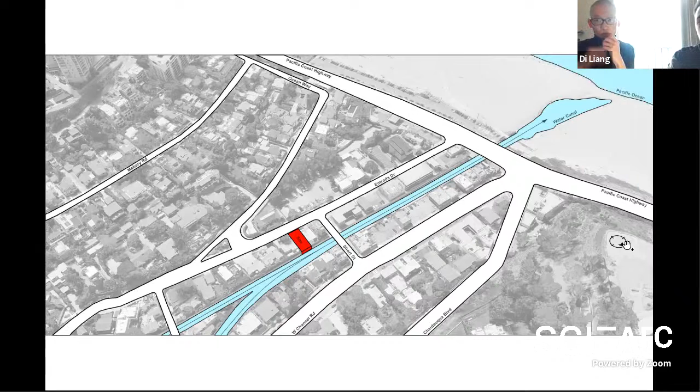So we're gonna start by the site like everyone else did. The site is located in Rustic Canyon in Santa Monica, California. It's directly accessed through the Pacific Coast Highway at the entrance of Entrada Drive, and the site is bordered by a water canal that slopes down towards the Pacific Ocean.

So we're going to discuss the site potentials. This is the site with boundaries that extend 19 feet towards the canal, with basic dimensions of 30 feet by 60 feet. The view from the bridge shows the potential of the canal and how we could integrate it within the design. The second view faces west, the Pacific Ocean, but it's actually about 75% covered by the neighboring building.

So going vertical is important to have a view. The third view is actually facing east - this is the best view that we have on this site, facing nature and the hills.

Going to the site design - first strategy, we extend the platform to the boundary of the property. Second, we divided the landscape site into two parts. On the surface there are two parking lots and an entrance. We also have an underground opening space to let people have access to the canal, creating opportunity between the people and the water flows on the canal.

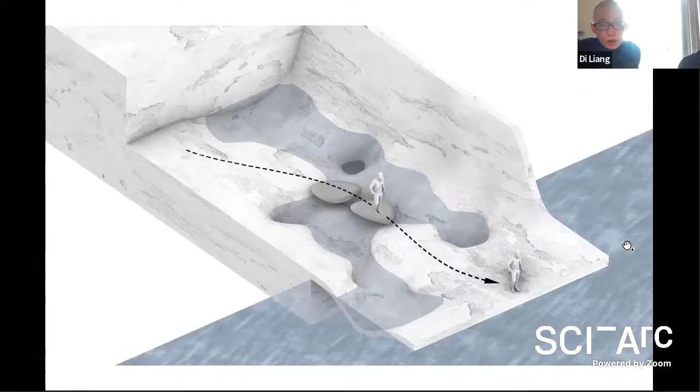So we sculpt the landscape, and the water is welcomed into our landscape, falling down into 3 holes. When people stand on the landscape, they will see this continuously falling down effect to the holes. Under the hole, we have a container to collect the water - we'll explain later how we deal with this water. The landscape is also walkable for people with 2 platforms.

So under the parking platform, we have a meditation space. From this section you can see how we deal with this space - people will see the landscape with a very unique perspective, at their eye level.

And then we have the secondary structures that will hold the slab, and the additional structure will support the specific form.

Moving on to the floor slabs and the circulation, this is a 4-floor building with one landscape, first floor, second floor, third floor. The circulation between the floors is connected by staircases. We have a staircase that connects from the landscape up into the first floor, and the first staircase is the one that once you park your car, you get up to the building at the first floor.

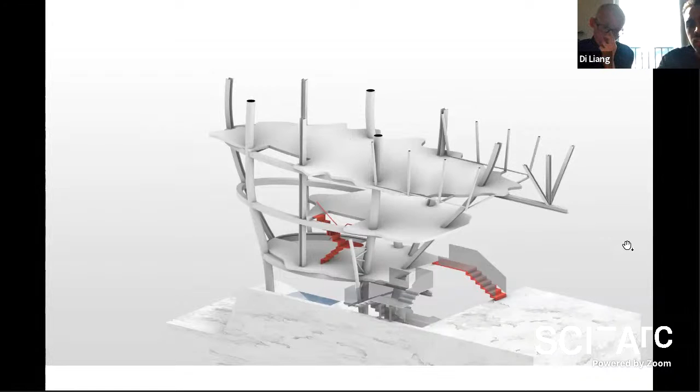It's a second staircase, a U-shaped staircase that leads to the second floor, a third staircase that leads to the third floor. And we have a panoramic balcony at the top, as you can see the floor slab, with another staircase that leads onto it.

Talking about the envelope, this is the envelope of our building. It is actually a stalactite envelope that looks like a cave or a rock shape.

What we did is add a box, an intrusive box in the back, as you can see here. Later we subtracted the upper surface of the overall massing to expose the structure, create a floor slab, and then create a panoramic balcony all around with a long ribbon window at the top, because the higher you go, that's when you get the best view and it will be panoramic.

Now what we did was do the openings. In regards to the site analysis, we said that the best view is on the east, so most of our openings are on the east.

This is how we glazed it and how we added the mullions. This is the elevation. So the paneling is regular and irregular at the same time. At some points it's a normal grid, and at other points it actually follows the surface of the rock.

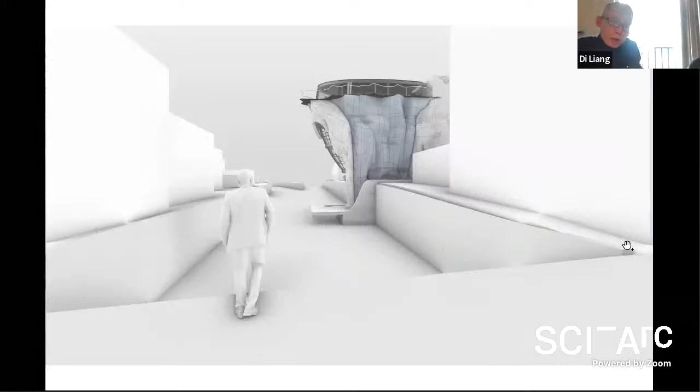So when people stand on the bridge, they can see this: there's a building and the water, there's a waterfall on this building. So we want to make some contribution to the urban view.

Another one is this is the first floor. Under the slab, we pour the water on these rock forms. When people are standing on the first floor through the glazing slab, they will see the water flows and falls down into the landscape.

So program and partition, this is the underground. On the left side, you have the meditation space that Di talked about. It is a space that is totally isolated and it feels like you're in your own bubble. And on the right, you have the landscape with the water and the structural columns.

This is how it would look like at an eye level. This one is a worm's eye view looking from the landscape up into the building, and this is the staircase access from the landscape to the first floor. This is the meditation space that we talked about and how it relates to the landscape and how the horizon of the water is at an eye level.

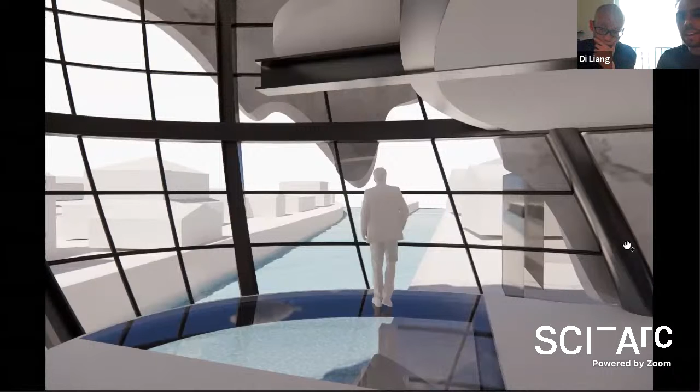This is the first floor. It will have the entrance, the living room, the kitchen, and the toilet. This is how the entrance of the building will look like. And this is the view that we get while sitting in the living room. This one is another view of it.

The second floor is where the master bedroom is. It will have its own bedroom with toilet included, and it will also have a balcony that overlooks onto the atrium, as you can see on the right. So we have a large glazing and a balcony that opens up to the atrium with a master bedroom, and this is how it looks like.

And the last floor, which is the third floor, is the workspace with a library and the wellness area, as well as the panoramic balcony that we talked about before. This is how it looks in floor plan. These are some interior shots of that area.

You can see this is the panoramic view from the front, right, left, with the balcony. When the person is standing there, he or she will be able to look at this view and also look at the other view from the other side.

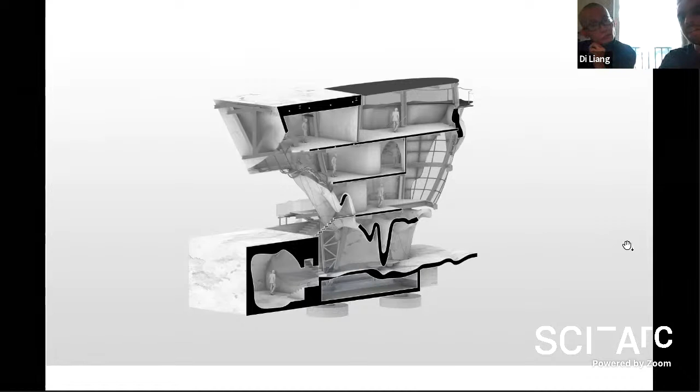The 3D sections, we really tried to have the idea of cave and undulating surfaces throughout the project at all sections. And yeah, these are pictures of our physical model.

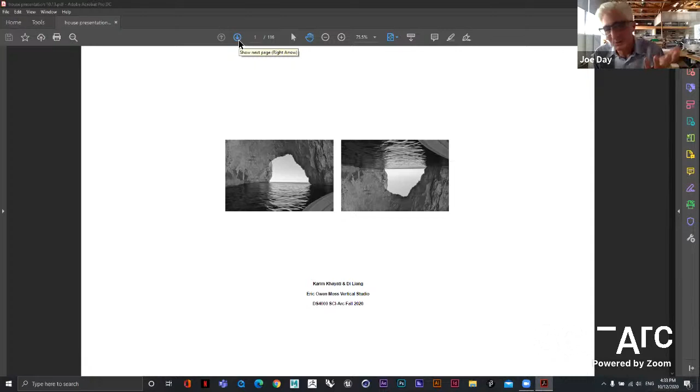I'll get out of the way and let Todd and Eric speak, but I want to talk about the superstructure, because I think the biggest issue is that boxy move on the southerly end of your project. If I imagine your project as a vessel, the nautical architecture seems to go astray in the bridge—in that one volume to the upper left that echoes the normative nature of your subterranean viewing volume. I'm wondering why it has to, and what it does to the entropic drape of the rest of your project to anchor a box to it that way.

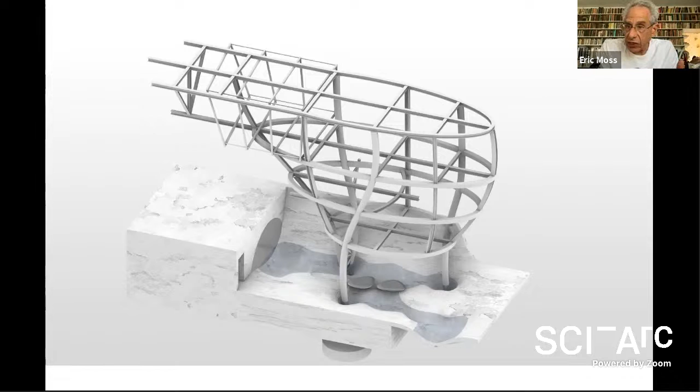From another vantage point, it actually doesn't bother me at all. I think the rule—and we talked about this in the first project—is how redundancy gets to be no longer an exception but more systematic. What's odd is more the floor plan, because you made it a workspace in a library, which is fine with me, but you've got that plank flying out that you can't access. The floor's form language is the irregular line from the stalactites, which probably invalidates the floor plan.

The fact that you could put those different pieces together—you have the surface of the curve, the surface more conventionally of the ellipse where it's glass, and then another shape. I like it actually. Whether we agreed on it as a final solution, I'm interested in the possibility that students could move out of there—you make something, it starts here, and it's like this, and these are the constraints, and then all of a sudden it's something else. The limits you impose, and then you go the other way.

I can see that capacity interests me—to do something as if, though this isn't quite right, another architect, while there are two guys on the team, one was sleeping and the other came in and put this piece in, but it actually worked, as if while one guy slept the other did the drape, the irregular cave form, and then he went to sleep, and the other guy came in and moved the glazing to the perimeter of the structure. There are pieces like that, and putting them together is pretty convincing. It's a very unusual project, on top of which forms like this, in student work, often don't validate themselves.

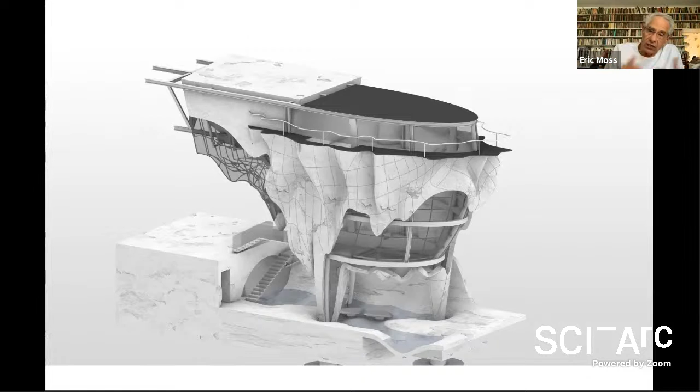The deck up above and the use of water—the association from the canal into the pool, into that storage thing, looking out at it from underground, falling down on top of you through this irregular stuff—it's pretty dense. You can get at it from a number of vantage points, which is one of the criticisms of Todd: you'd make something and that's the end of it, as opposed to adding extenuating circumstances which validate it more. I think it's pretty good.

I agree, I think it's a very weird project, but weird in a good way, because all the associations people are making quite comfortably fit, but they aren't the only association. Joe mentions it kind of looks like a boat, and I look at it and think, yeah, parts of it look like a boat, but it also looks like an iceberg in dry dock, somehow suspended out of the water.

But then as soon as I start to look at it as an iceberg, it starts to morph into something else. The project seems very accomplished in making a lot of associations. So when I look at it from the top, the iceberg doesn't have any kind of mass anymore. Now it looks like a curtain. And the way the building accrues associations but never becomes beholden to any one of them, I think is super interesting.

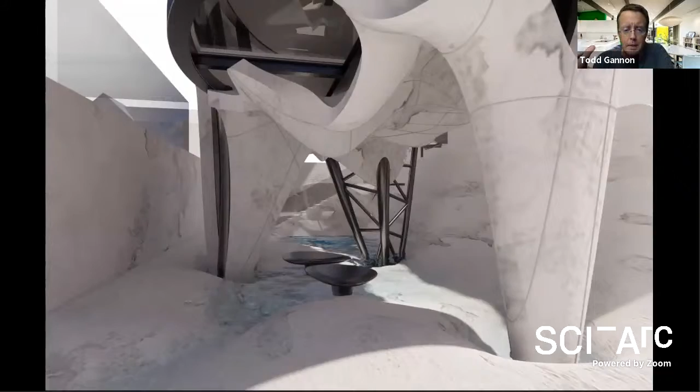And even in the way the materials begin to express themselves, the outside, in the renderings anyway, gives the impression of something quite rough, sort of hewn out of stone. But then I get to the inside and it seems impossibly slick. The steel is very crisp and shiny. Look at that. You would never in a million years imagine that to be the inside of that thing we were just looking at the outside of. And yet, as Eric was saying, it somehow works.

The building is kind of going for broke in its associations, and I think the two of you are doing a pretty good job staying one step ahead, like there's always more. Now the danger is, how long can you keep running? At a certain point you have to stop. And what are you left with once you've stopped? But I think that's not a bad place to be, particularly as a student, to demonstrate that you can. This is great, actually.

And it's not only a question for Todd Gannon and Franz Kafka. It's like, where's the end? Yeah, I was just looking at a translation—I was actually talking with Jeff about this—of the Castle novel, which just ends in the middle of a sentence. I'm not sure how to extrapolate that to a building.

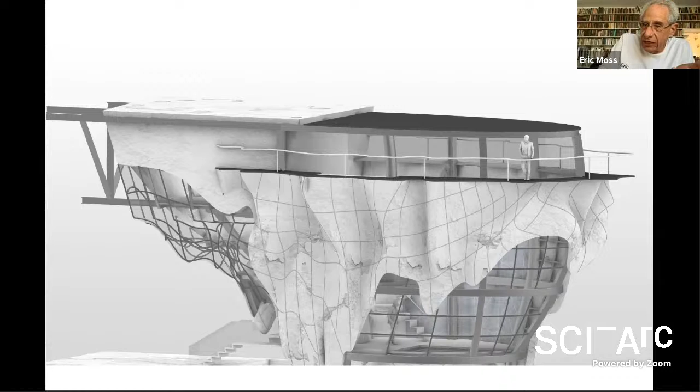Yeah, you're right, I think that's right. I think this one doesn't have a joint. In the end, as I see it, this is one architect or one architect team - it's consistent enough from one end to the other that it evolves as it moves from one conceptual form language through another. I don't know the explanatory language for this, but the associations run backwards and forwards, like they belong to each other - like the joints in the cave reform in the joints of the glazing. It's recursive, I think so. Even their play with water echoes that, really. It has a kind of thoroughness.